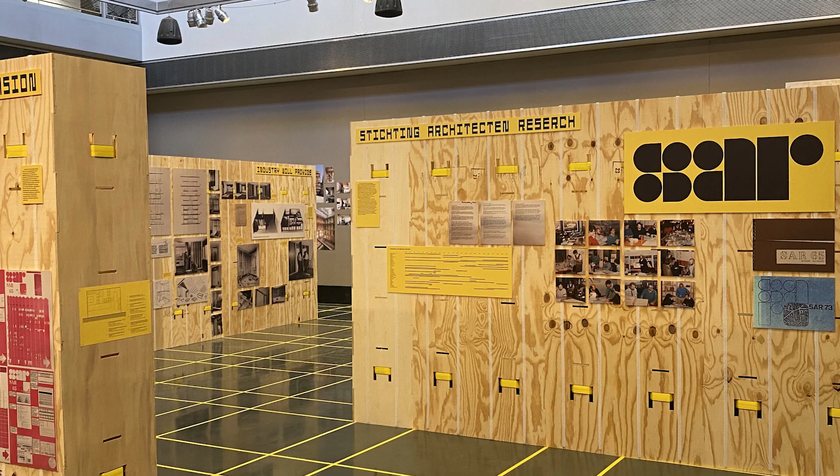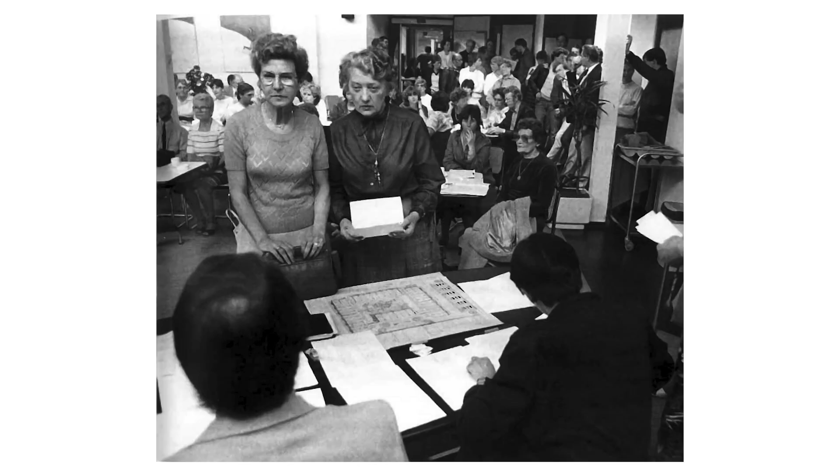Mass Support supports the legacy and contemporary relevance of the Stichting Architecten Research, SAR, and excuse my Dutch, a Dutch architectural think tank active between 1964 and 1990 that proposed a radical new way of thinking about mass housing, one that fused the efficiency of industrial construction with the flexibility of user customization. Initially led by John Habraken, the SAR suggested new functions for the construction industry, for households, and crucially for architects.

Today, an impressive array of speakers will address flexibility, resident input, and modular building in contemporary residential architecture. The symposium will complement and extend the exhibition's themes, exposing the audience, who consists of students, academics, policymakers, and practitioners, to the under-examined interface of robust community engagement and innovative construction technology. I look forward to their insights on these important questions. What can resident control enable politically? What can modular construction enable architecturally? And what can flexibility enable at the neighborhood scale?

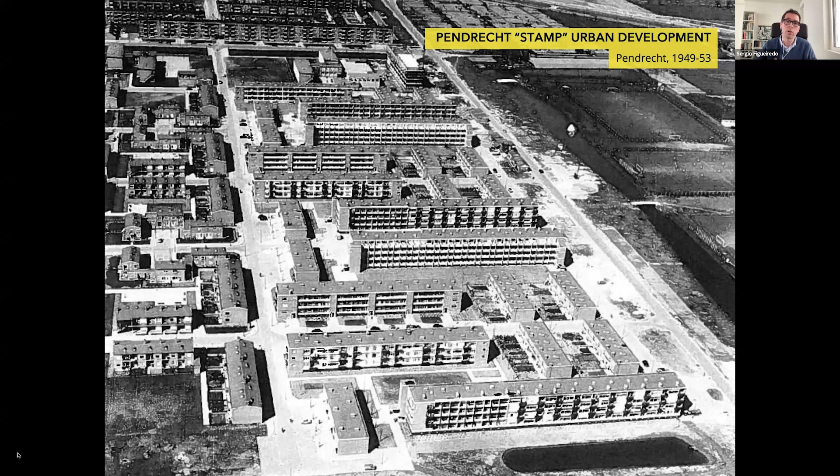This was also, let's say, supercharged in the early 1960s when the housing minister at the time, still intent on counteracting the housing shortage that was still acute by then, not only attempted to stimulate housing production, but also to encourage industrialized building techniques. Again, this created a lot of uniformity in the built environment.

So the consequence of these big building projects of system buildings and other rationalizations of the building process was, in fact, the creation of a rather monotonous urban fabric, primarily in the suburbs, but also increasingly so in the inner cities, with almost the same block of flats and almost the same terraced houses everywhere in the Netherlands. So this has been identified by some critics in the Netherlands as an urban environment that was seemingly lifeless, monotonous, and where very little attention was paid to the user or the inhabitant.

Now, the SAR, as will become apparent, I suppose, not only during this introduction but also during the talks that will follow, actually appeared as a response to that. It had a practical component, which was the realization by some architects in the Netherlands that by following an industrialized building process, the architect was losing its position within the building process itself. So there was a big concern that construction companies were taking the lead in developing and shaping the built environment in the Netherlands. But there was also this concern about reconnecting, as Habraken would claim in his 1961 book, Supports and Infills, man and his environment.

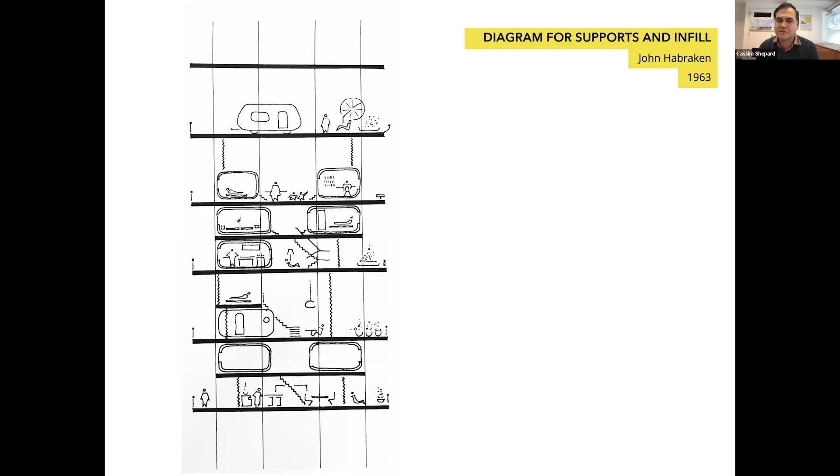Absolutely. And I think that's such an important point, because they weren't designing for only formal expression, they were also not designing for something to be finished, right? It was about advancing specific methodologies that could reintroduce a sense of agency on the part of residents into determining what is the configuration that makes the most sense for that particular household.

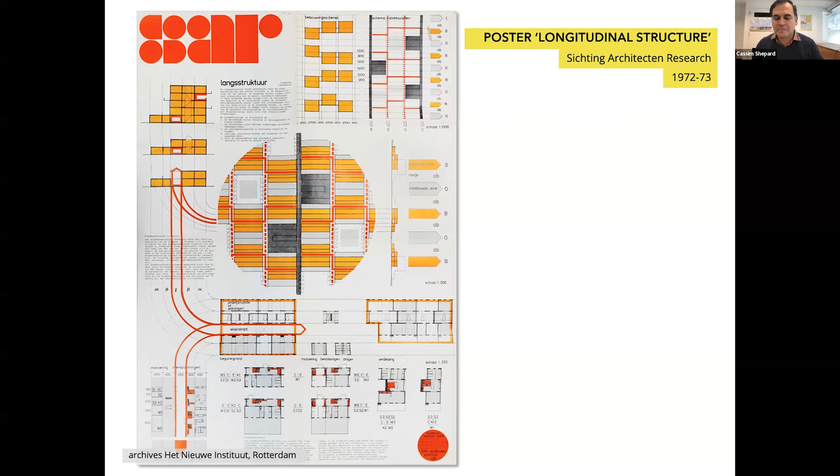And I think sometimes those who do remember the SAR think about it in terms of the technical solution that was advanced, but I think it's always important to remember that what's at its root is not necessarily the technical solution, but this deep desire, this refusal to remove the agency of users from that decision-making process. Who decides when about what? How can we design now for uses and different program requirements that we can't possibly anticipate?

I love this image, which demonstrates some of the different ways in which they designed processes for user consultation with residents who might have different kinds of household arrangements, different kinds of family structures, different kinds of needs for their space. And that emphasis on the diversity of different household types and how you can create systems to deeply observe how people use space and use that to inform how you can create systems that can change over time, I think it's something that really resonates today.

They also were very involved in informing pedagogy. As was mentioned, one initial home, both for Habraken as a professor, teacher and curriculum builder, and also for the SAR and their experimental approach to designing these processes, was at the TUE, the Eindhoven University of Technology. And one of the many interesting architects who's continuing to interpret and reinterpret and think about the lasting influence of these ideas is Tom Frantzen, who studied at the TUE after John Habraken had left and had moved to chair the architecture faculty at MIT in 1975.

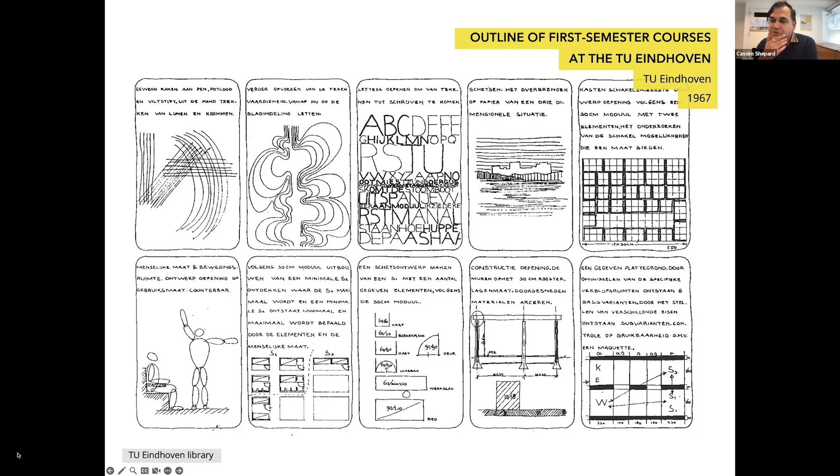So I'm very pleased to invite Tom to share with us a little bit of his approach to open building, the legacy of both the educational parameters that were established at the TUE, but also the lasting influence of Habraken on Dutch architecture, and how his views on these learnings have changed as his career has evolved. So welcome, Tom. Please share with us.

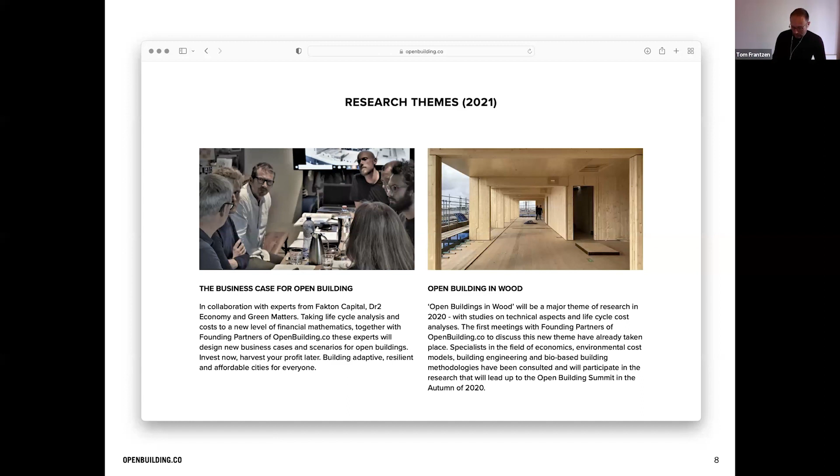We have 14 founding partners, and in 2021 we rewrote a manifesto, which of course also incorporates the legacy of John Habraken. And we identified a few research themes, especially the business cases and building in timber. The business case being very important because normal developers weren't interested in open buildings because they simply thought they were too expensive. And to show that it wasn't, we had our case studies that were mostly actually built to show that it is possible to build open buildings.

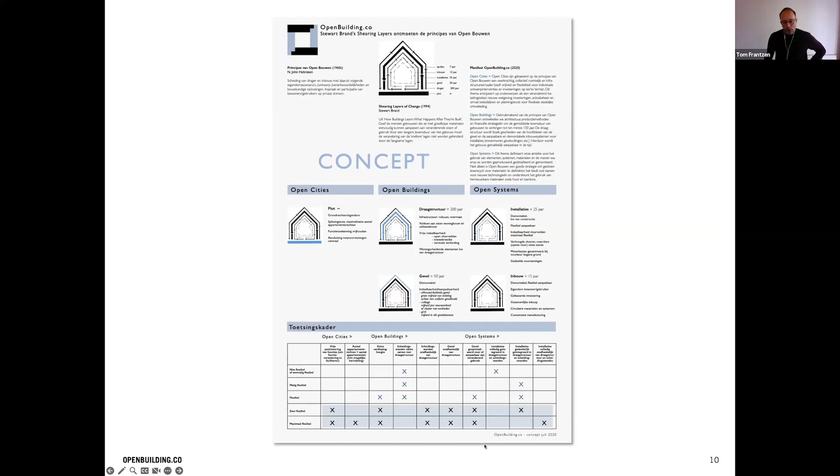We also identified our concept, and here you also see the shearing layers of Stewart Brand. And we developed evaluation criteria, which are more stimulative. And we would like to build buildings at a maximum flexible level. And we did so in the Buiksloterham in the north of Amsterdam.

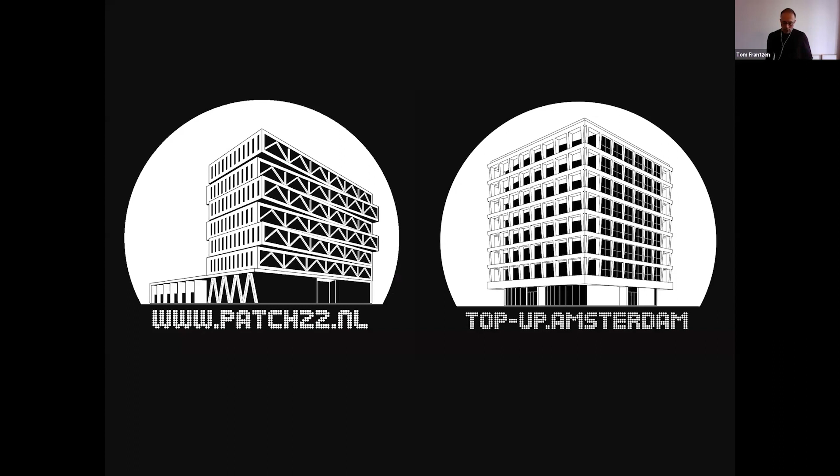These are all buildings in the north of Amsterdam and all built by architects of the open building community. And in this area, I built two buildings, Patch 22 and Top Up. And as Kasim explained, to do so, it was necessary to start a separate firm, a development company.

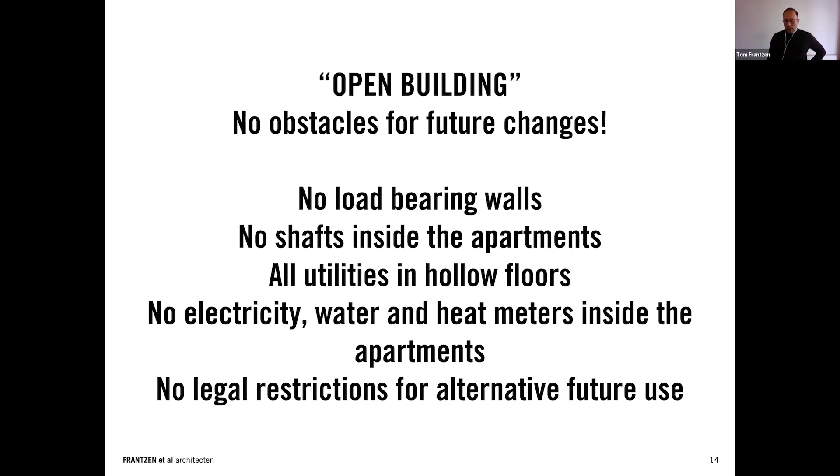And for us, open building means that there should be no obstacles for future changes. So in a technical sense, there should be no load-bearing walls, no shafts inside the apartments, all utilities in hollow floors, no electricity, water and heat meters inside the apartments. And also very important, there should be no legal restrictions for alternative future use.

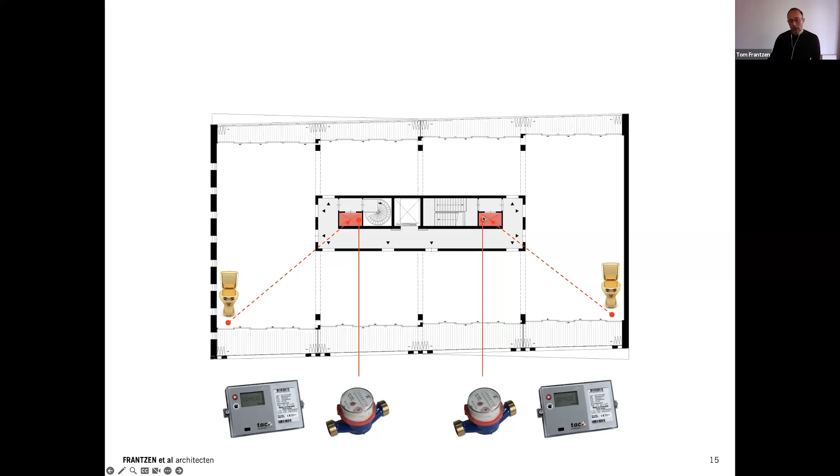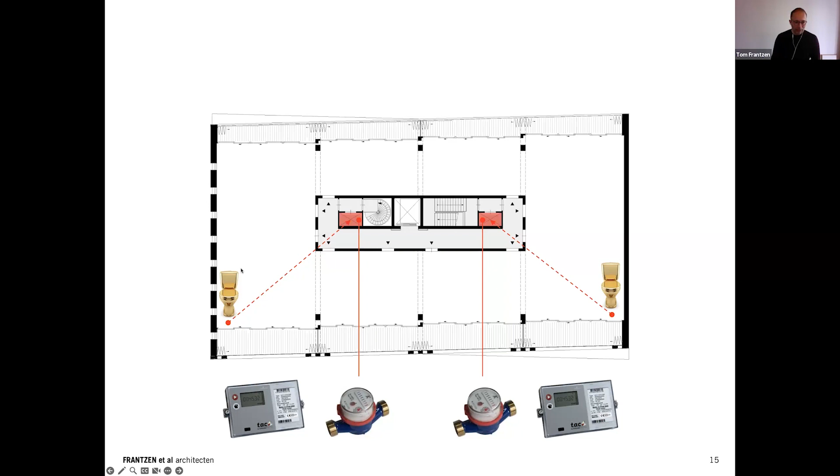This is the floor plan of Patch 22, in which you can see that it is a totally open floor plan with the meters inside a shaft in the central core, and enough sloping angle through the floor to be able to set up a toilet in the outmost corner of this building.

It is also possible to divide this building into maximum 48 apartments. And there are also a maximum of 48 legal units in the division deed, which is very important: once you build an open building, an adaptable, flexible building technically, you should also be allowed to use it flexibly in the future. And this is done in all the legal contracts that are involved.

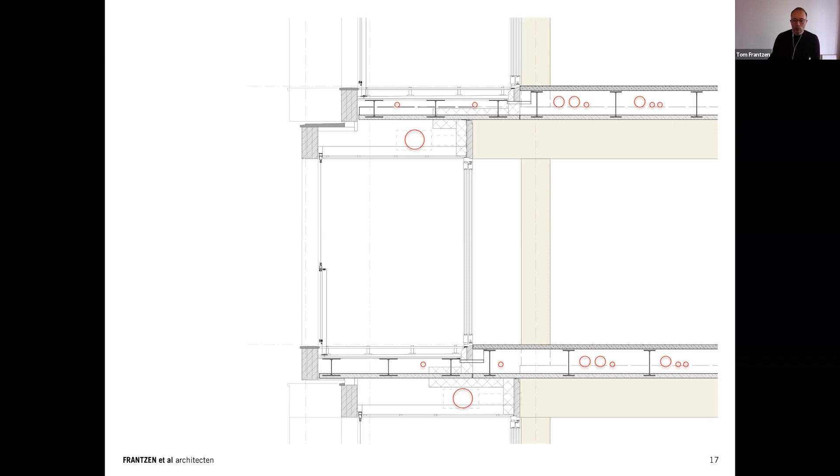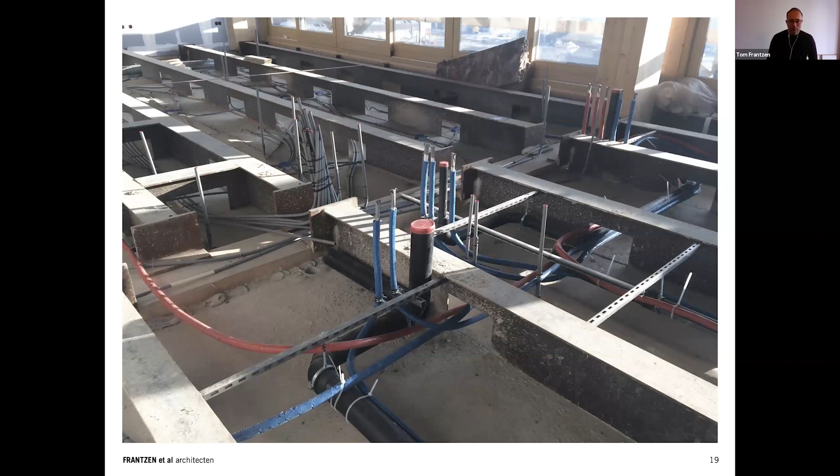We designed hollow floors in which you have all the piping and all the drains. And this is what it actually looks like when an apartment is almost finished for our buyers to enter their homes. Our buyers could install all their drains and installations themselves in the floors, and then put on a top floor, and then start with their infill.

And to get back to the article that Cassim wrote, Mass Support, it says for Habraken, the distinction between the base building support and the fit out, the infill, is primarily one of control and design and only secondary technically. So that demands that the return of consultation and involvement on the part of the users in the most literal sense must be accepted.

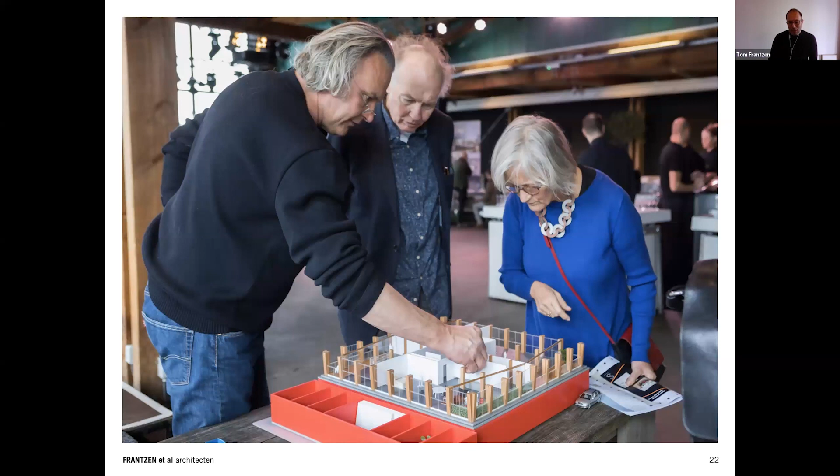And I think that is exactly what we did, and we sort of reinvented the wheel, because we were not familiar with the ideas of Habraken, but we started to recognize them again in what we were doing. And it is funny that we were almost doing exactly the same. We have built models with removable building parts in which users, under the guidance of architects, could simply try out floor plan layouts in the units that we designed.

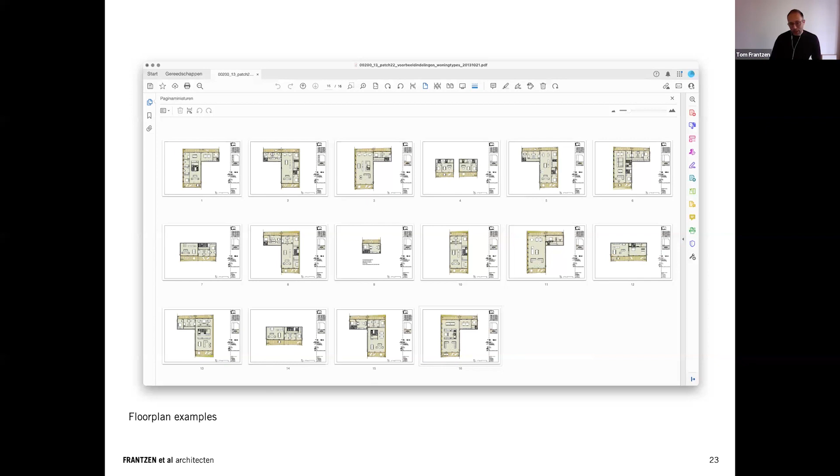In Patch 22, of course, to show the possibilities of such a building, we designed a lot of floor plan examples. But it is funny to see that none of those floor plan examples was actually built. In the final building, we had 21 owners, 26 apartments, and none of them used one of the example floor plans. Because when it's possible for people to design their own homes, they become far more specific than the scenario thinking that we as architects can do.

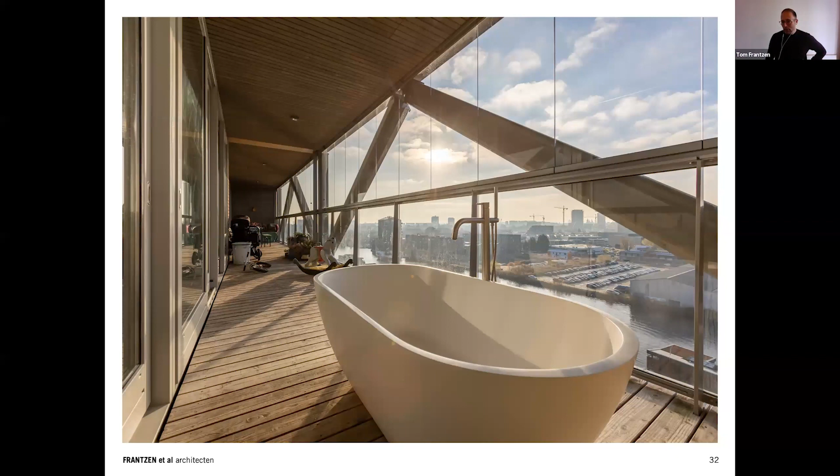So I will just show you a couple of images of the different apartments that were the result. And he's very happy with his apartment. In this apartment, children learn to cycle inside. It's even possible to make a vertical connection between the units. And what we never thought of, but people started to install bathtubs in their loggia balconies.

So this is all collected in one collective building, Patch 22, which has a strong identity. And I think that is very important, that a collective building has an architectural address and doesn't show the individuality of the buildings. This can be done in terraced housing, I think, but not in an apartment building.

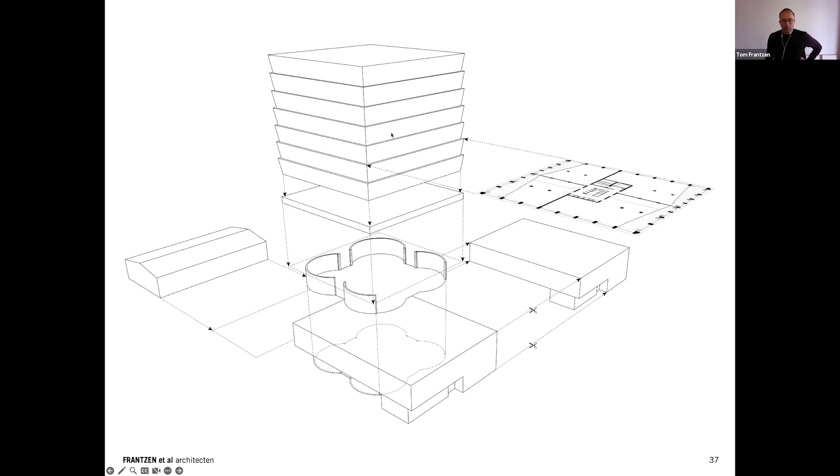And we were very lucky that we were able to buy the plot next door. And on this plot, there was a former industrial building that we could simply top up, just as was mentioned in the report, as an important strategy to stay within the ecological constraints of building. So we kept these round concrete walls, and on top of it, we installed a new timber building, which again, like Patch 22, is a totally open floor plan.

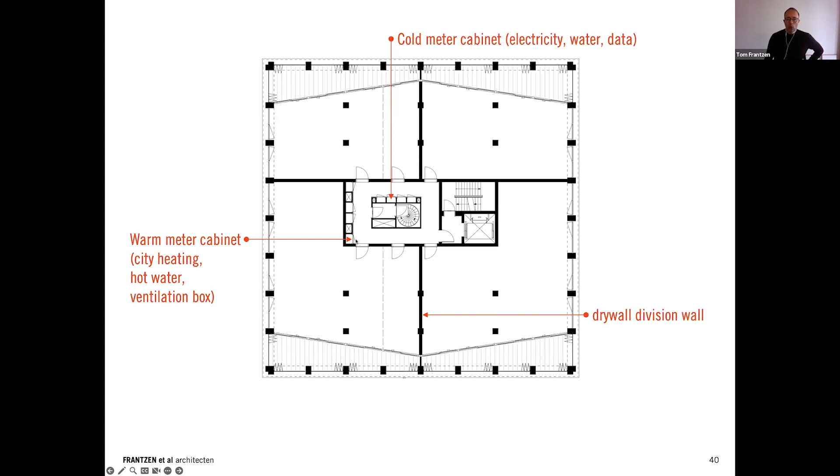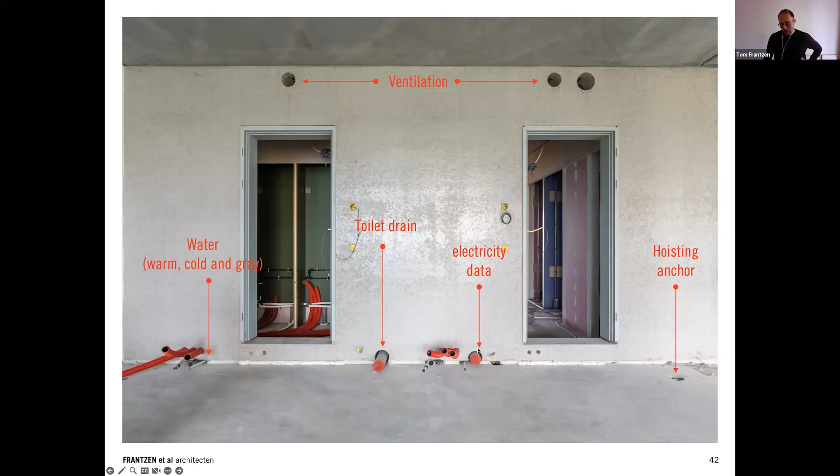And this time we showed a lot of example floor plans, and again, none of them were built. In the end, the floor plan was divided up into mostly 4 apartments, and it is very important that all these meters are inside the communal core, and this is what that looks like. So this is a technical solution, and this is what it looked like when people got the keys to their apartment. So they could connect to all these openings and drains and the other supplies. This is really what it looked like when they stepped in after they bought the apartments.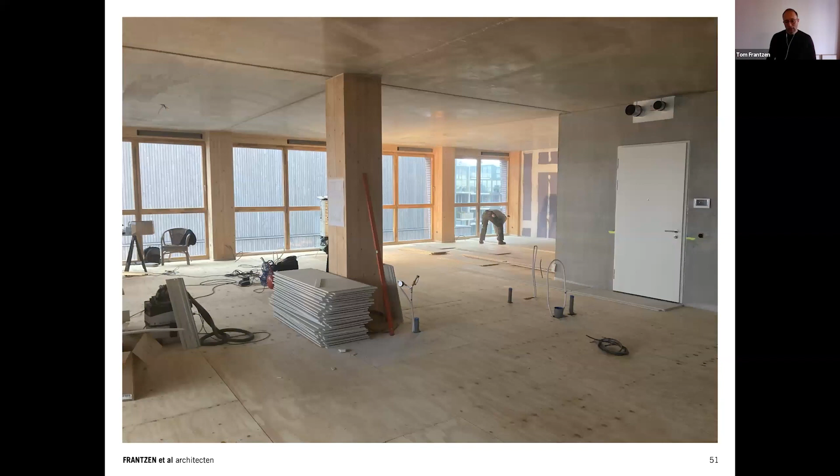Then cement-based panels in which radiant heating is installed. And again, people started installing bathtubs on top of their balconies. And instead of having the bedroom next to the window, they installed, for example, their showers and bathrooms next to the facade. Again, a few images to show the individualization of these apartments.

And of course, this is all high-end. This is not affordable housing. But like when Tesla started with the Model S, if you want to sell sustainability, at first you have to sell it to people that can afford it. So that is also the case with adaptability.

And in this way, we had two buildings built in the north of Amsterdam, and I think this is the state-of-the-art open building at this moment in the Netherlands. Thank you.

Thank you so much, Tom. I think that really provides an excellent context and grounding, both in how these ideas of open building continue to live on, but also how they continue to be reinterpreted. And whether or not one is directly aware of the provenance of some of these ideas, there are things that are baked into the DNA of a lot of the education that I know that you received, and hopefully will continue to be a feature of architectural pedagogy going forward, thinking about flexibility, not just in terms of

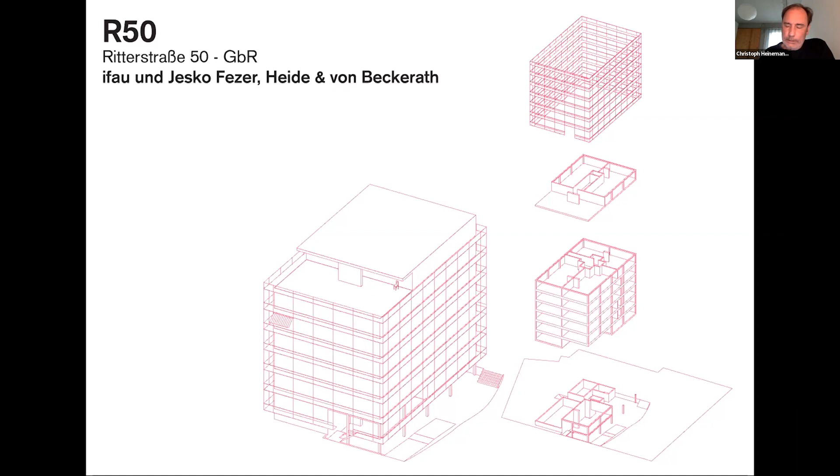This may be important for the discussion afterwards, how the role of the architects may change, and also how such projects can be developed, and what is the political and institutional framework behind it. The project R50 is situated in the Ritterstraße in Berlin. It's in Kreuzberg, so it's in the center of the city. You can see the building here in between modern housing development.

Post-war, the whole area had been destroyed in the war, and there are buildings from several phases of reconstruction of Berlin. The wall is not far from there. So when the wall was down, suddenly this area was at the center of the city again. Before it was, you could say, the fringe of West Berlin. And as Berlin housing is based on rent, most of the time, the city wanted to introduce some spots to install projects based on ownership, interestingly, because this policy has completely changed.

But at the time, as we developed the project, there were no programs, there were no subsidies for affordable housing or social housing, you may call it like that. So everything was on the free market, and the city asked for concept-bound competition. So you can enter a concept for a housing project, and they would give you the land and 1 year time to develop a project, and you could acquire the land at a fixed price. So it was out of a bidding process, so you could install quite affordable housing projects. And this opportunity was very interesting for us.

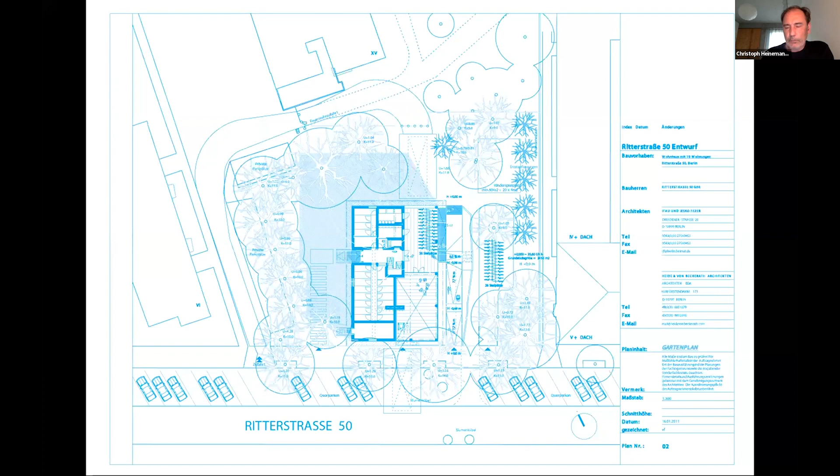Briefly, the building on the site. It's positioned in the middle of the site with a surrounding garden. The garden in this context relates to all the gardens in the surrounding, to the open fabric, but the house also relates to the street with its facade. And I could talk hours about this context in between modern housing fabric and all those changes that took place in Berlin in the last 60 years. I will spare you this and come to the structure of the house.

Tom Frantzen already explained what is important for such a building. It's not an open building, but we wanted to allow different types of negotiation based on the two premises along which we developed the project.

One premise was to allow for individualization of the apartment layouts, so to really allow the future inhabitant to create his own apartment, and further on we wanted to allow for transformation of the apartments in the future, and secondly we wanted to allow for a high amount of common spaces.

From the start we included a high amount of common spaces also in the budget, and we wanted to allow the group of inhabitants to negotiate the disposition and the place where common spaces should be and with which program. So what did we do?

We have a central stairwell with a lift in the middle, and we have a surrounding row of columns every 6 meters with a supporting beam, and the floors as such have no further obstructions, so that we can size and resize apartments according to our needs.

We have 3 shafts: southwest, southeast, and north. In the north apartment, we have light from west and east and north, and the shaft in the middle, and in the other apartments along this wall, so that the position of bathrooms and the toilets and the kitchen is fixed, but the rest of the floor is open. So in our project, you can't move around your toilet as you wish. It is really bound to the shaft.

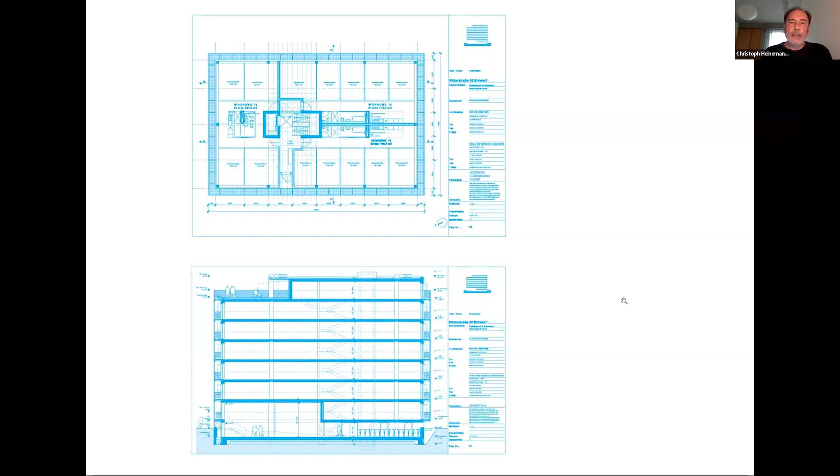So here you can see a conceptual drawing at the beginning of our project, where you can see the fixed parts, like the stairwell and the bathrooms and the kitchen. And you can see that you can furnish it like an apartment, like a loft, and you can also densify it with separate chambers or rooms.

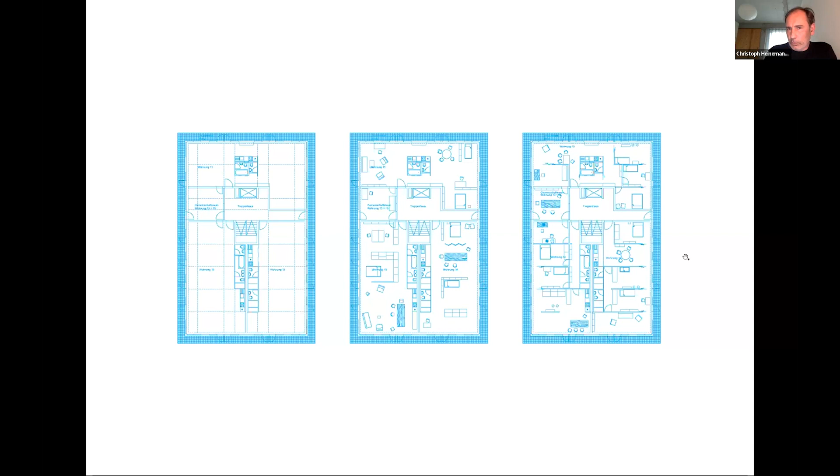And what may be interesting also is that in the beginning we included 25 square meters of common space on every floor. We wanted to do a cooperative. Afterwards, the group decided to change to real ownership, and with this change in the framework, also the disposition of the common room changed.

And this is a point I really want to stress, because for us as architects, this is a very important driver, that with the user participation, we can really create architectural elements with a very specific quality, and at the same time, for instance, affordable housing, because there is no contradiction with a user and the elements we apply.

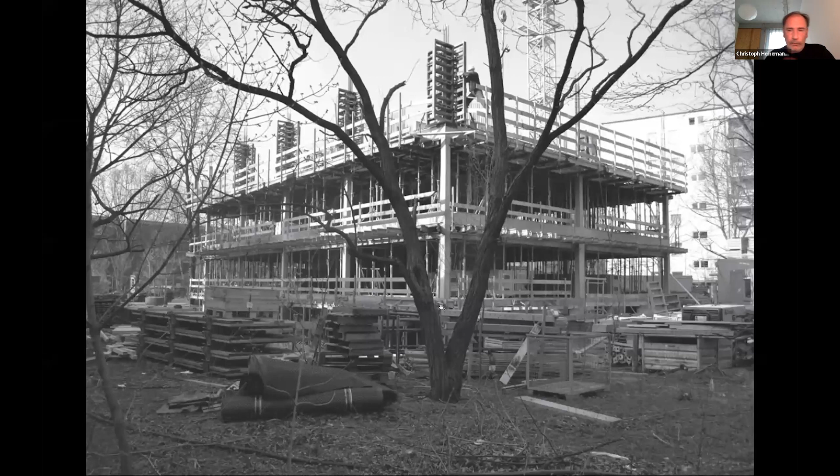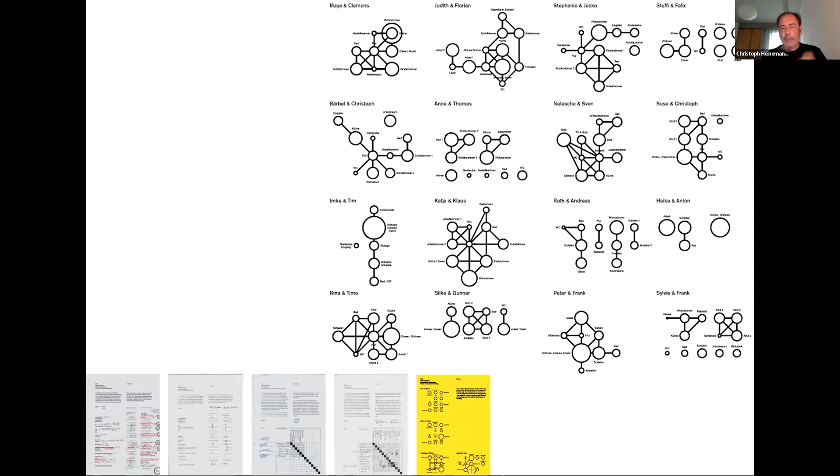So this is what we may call the support, the columns and the floor space, and this structure allows for a multitude of relations of different forms of living, of dwelling inside the building. We started with those diagrams. We asked every family to make a diagram on how spaces should relate, and we took these diagrams as the base of a design of future apartments.

And you can see we have 19 different apartments now, which are based on a common standard of constructive elements. So you could say they are same, but different. Spatially, they are completely different, but they're all done in one standard of several ways to construct plasterboard walls, etc.

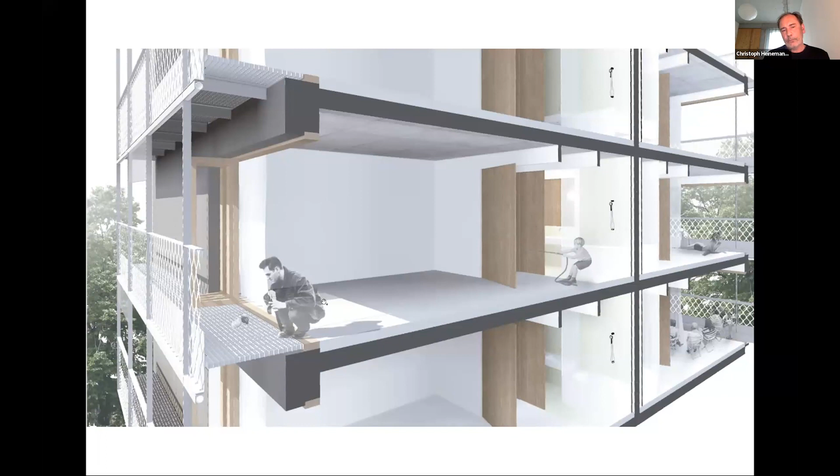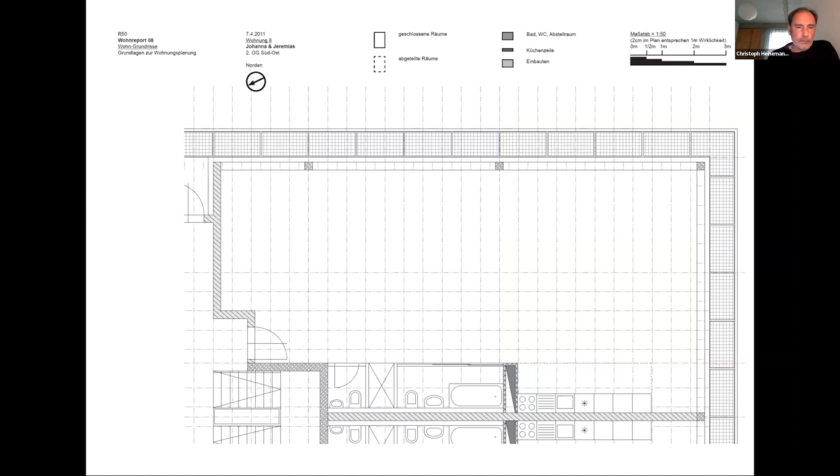Here a section. You can see the balcony allowing to step out of every room, and the supporting floor. Just a short stroll through a design process, a diagram of one family, and for a start, and then this 60 centimeter grid loft space, we started to test different approaches to the apartment.

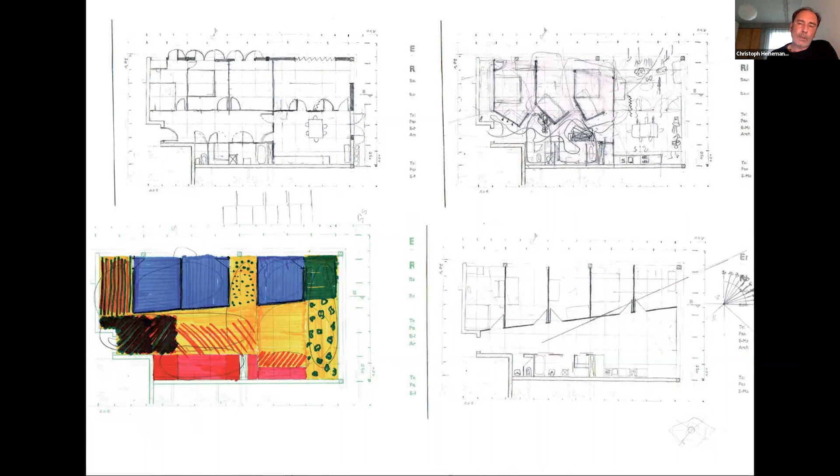In this case, they wanted 4 rooms and a large living room, and they used what usually would be a corridor space to create a larger living space. This was our answer as architects, putting this into norms and standards and layouts we could handle. In the end, you can see the apartment here above with a large space here, and the kitchen should have been here.

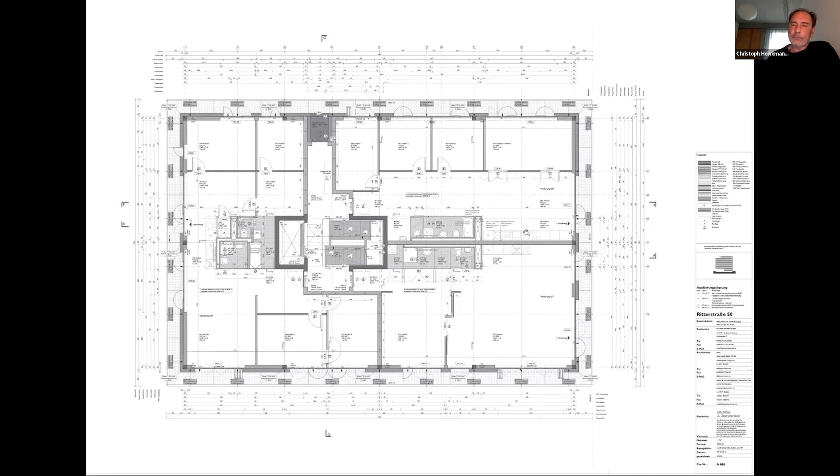And when they moved in, they discovered that the wall was beautiful. They thought it was beautiful, so they decided not to move the kitchen here, but to move it in the back, in the middle of the apartment. These are possibilities, and this goes on with this type of transformation.

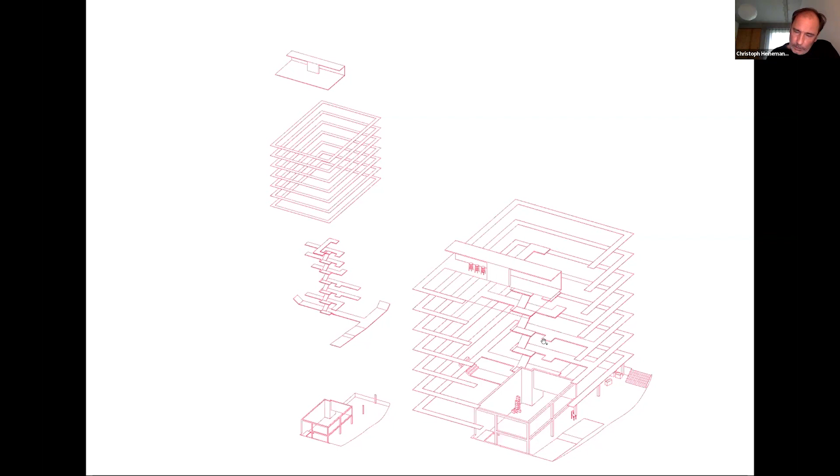Another part of the negotiation process of the inhabiting process, which starts in the planning phase, was to find out where to position the common spaces. And this is a party we had in the future common space, where we decided to pool all the 25 square meter spaces we had initially on every floor into one big space,

because changing from cooperative to ownership means if anything fails, if, for instance, our common activities would fail, we would lose interest. We would need to sell the space, for instance. So there was a very interesting decision to pool all these 25 square meters into one big space, which we could maybe sell someday.

60 seconds, Susanne? Yes, about 60 seconds. Perfect.

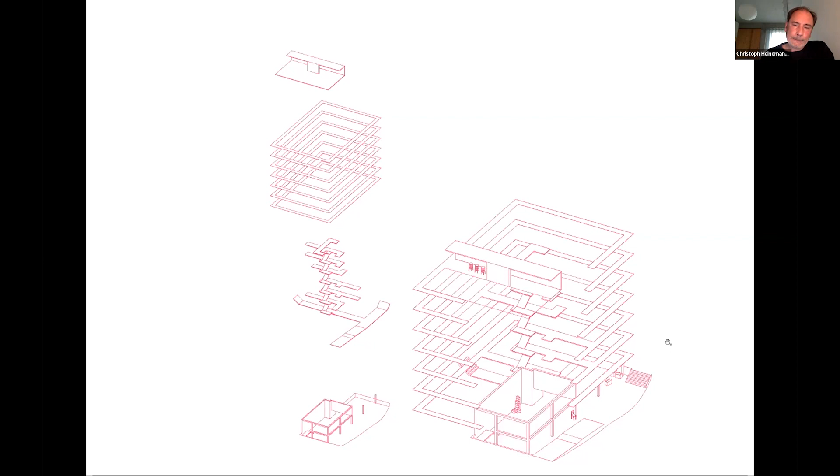All right. So what you see here in this axonometric drawing is this big common space, and all the other common spaces, because also the balconies are common spaces in this building. So we had several discussions on the use of a common space, and there are multiple activities like working, making music, having parties, having a space for guests, and they're all conflicting activities.

And we found it very important to have a space which allows for all those activities and uses, but also maintains a certain form of conflict and of continuous negotiation, which keeps the space really alive and puts it into question every day. This is a space in its final stage. And

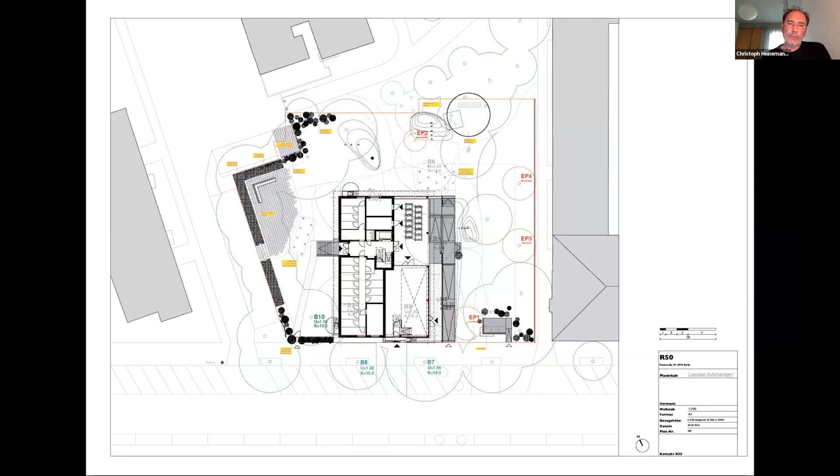maybe just another hint about planning, the agency of inhabitants. We did the garden only a year after we moved in. It's a continuously changing plan. We're designing it together and changing it together. And just for the end, you can see how the building looks today.

Thank you so much. Perfect. I think that perfectly explained the building. I think we can move around in it now, and let's move on to Barcelona, and then we can compare these projects in various aspects.

So Cristina, I'll give you a 2-minute notice. Does that sound good? Good. Perfect. So I share my screen. Hello, everyone. So I hope you can see the screen.

So I will introduce the case study of the cooperative housing project of La Borda in Barcelona. And basically, this is our first collective housing project. And it was the first cooperative housing developed following the model of right of use on public land in the city of Barcelona. And basically, I think it's really important to contextualize, because it's a project that emerged in a specific moment and in a specific place.

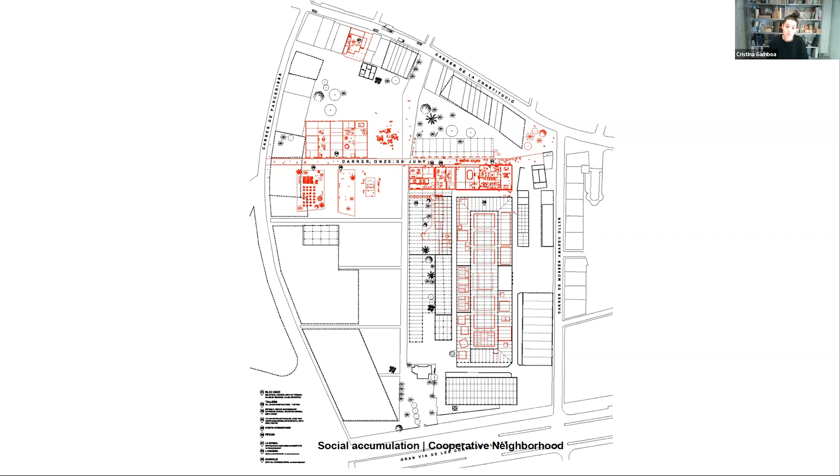So it was an opportunity for the neighborhood to really start the transformation and implementation of a series of projects, to really build a community in that context. And that's why we also like to talk about social accumulation, sometimes a better kind of name instead of social innovation, that sometimes these kinds of projects and new models are also understood in that sense. But I would say that without the economical and social context, without this frame of Can Batlló and the neighborhood, this would not be possible.

And basically, from the General Assembly of Can Batlló, thinking of new forms of providing decent, stable and affordable housing, the General Assembly of La Borda, this co-op emerged, and was following a model that was present in many other countries. So the General Assembly of the project was learning from Uruguay with the FUCVAM model, from Denmark with the Andel model, and many other models that are present in countries all over the world.

But the key points were this idea to provide a non-profit model based on collective ownership, where the member of the co-op and the future inhabitant has the right of use of one flat for their entire life, without a time limit. So basically, the collective ownership was a tool to avoid speculation. When we are talking about Barcelona, where there is such a small amount of social housing, where the private market is totally controlling the housing stock, it was one of the main values and ideas of the project.

So this idea to avoid speculation, to make housing affordable and inclusive, and through the co-op, it was a community-led project, and the project didn't want to become a specific and unique project. The main idea was to really become a model, to be replicable and as sustainable as possible, environmentally, economically, socially. So understanding sustainability of life in the broadest way possible.

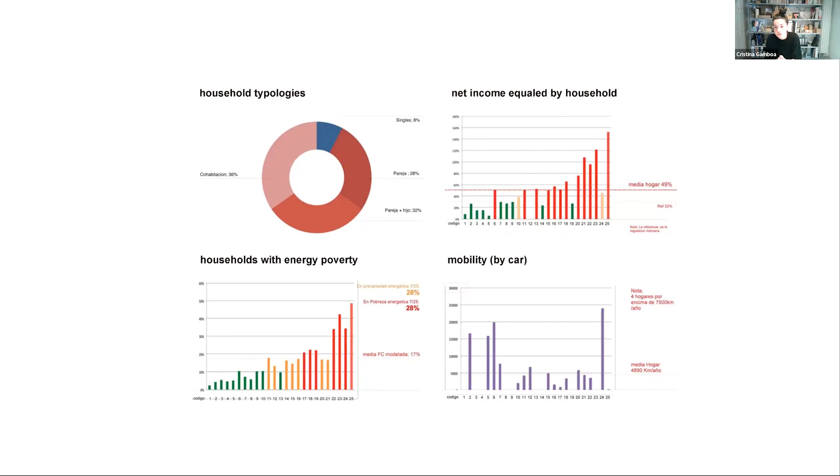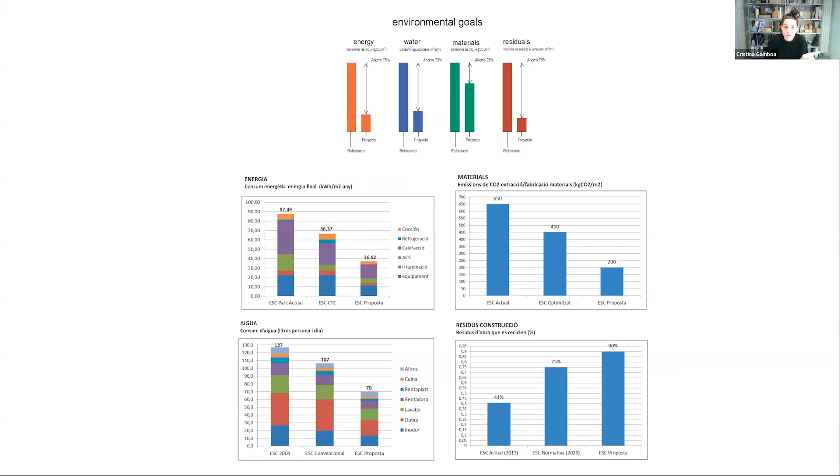And so a series of methodologies allows us to really understand this radiography of the community that give us this key information to challenge, for example, the parking regulations, but also in this process of understanding the user and setting these values and frameworks of the project, discussions about sustainability, how we define the goals of the project, that basically were key to define the energy strategy and also the material strategy. So this idea of a passive building that is led and controlled by an active user. So the main strategy of the building, densifying the south facade, generating a courtyard that became energy saver, and all this with this kind of transition from the public space to the common areas in the ground floor with a public passage to the most private units in the upper floors.

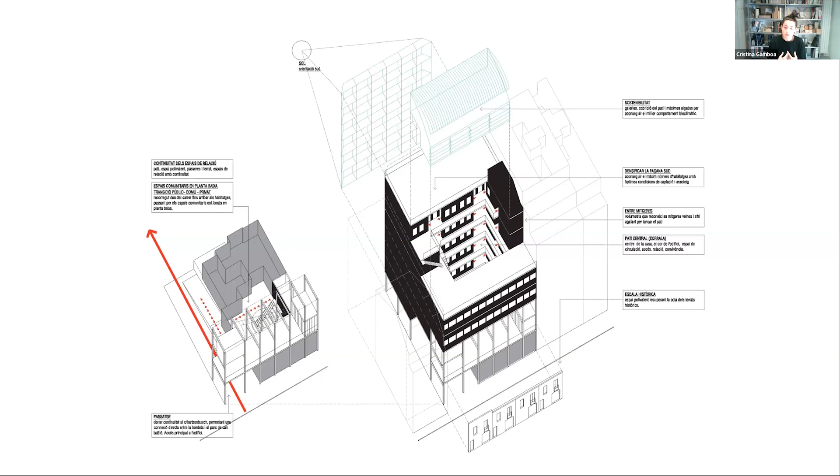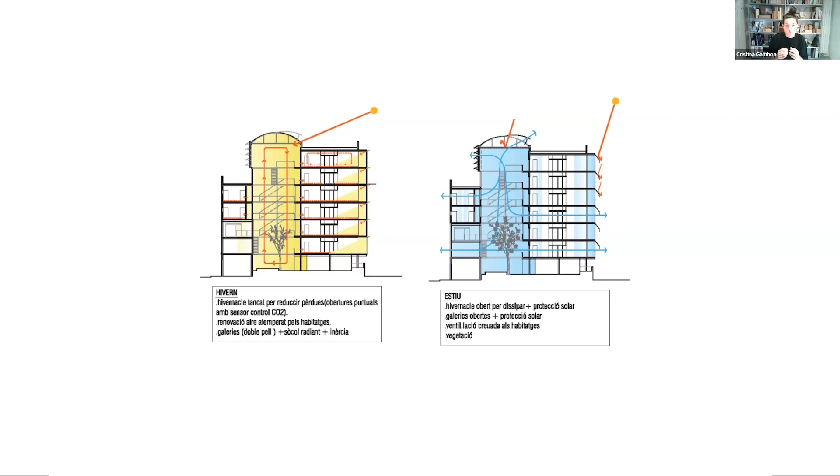So it was a combination of the community model and the energy model, and with this kind of unbalanced section where we can see how we densify the south facade to put as many units as possible, and also how all these thresholds and in-between spaces became energy devices, but also spaces of interaction of the community. Cristina, you have 2 minutes left.

Exactly, great. And basically, all this transition from the public to the interior, to the common areas in the different levels of the building, arriving to the common spaces. The second step was this discussion about the common areas and how these common spaces allow to imagine new forms of conviviality that had an impact in terms of gender distribution of the household, but also in terms of economical and environmental aspects. But what was even more important was how this was also defining a redistribution of the area of the unit. And this was key to start imagining the matrix, the scheme and system to define the units.

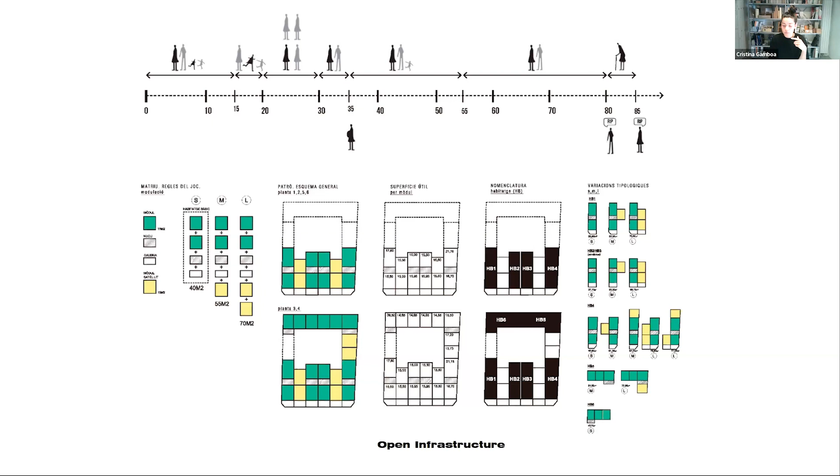And basically it was through a matrix of non-hierarchical spaces that can be connected and organized in different typologies, something that can change through time through a structure that was interconnected, allowing with light divisions to define the size, type and characteristics of typologies. The layers that we were adding to this CLT structure were basically the installation, kitchen and bathroom, and also allocating outside the unit all the heating meters and all the systems to facilitate the maintenance and the exchange of the site.

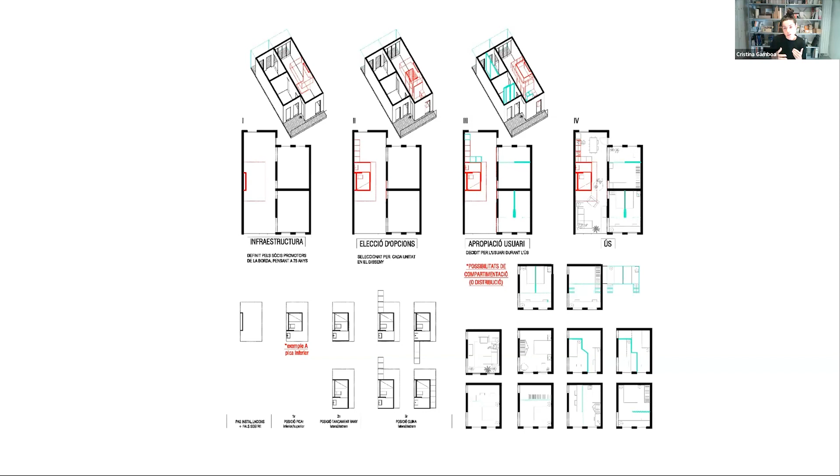So it was this idea of the infrastructure, the set of options with the position of the kitchen and the entrance to the bathroom, and the lighter divisions based on the user needs. So it was also important to define a protocol and a manual to really understand how to intervene, to make it easy to be removable and to change in the future for future inhabitants.

And basically this was this kind of naked infrastructure to be transformed by the user with really simple materials and solutions, and also to reduce the cost, this idea of phases of construction with a second phase for all the common areas to be transformed in the future, at the same time that all the activities started to be developed, realizing the impacts of all these activities in the building.

And I think that we can discuss this later, but basically La Borda became a pioneer project as a policy in Barcelona that was promoting new cooperative housing, also the emergence of new stakeholders, and also its replicability outside Barcelona in all of Catalonia.

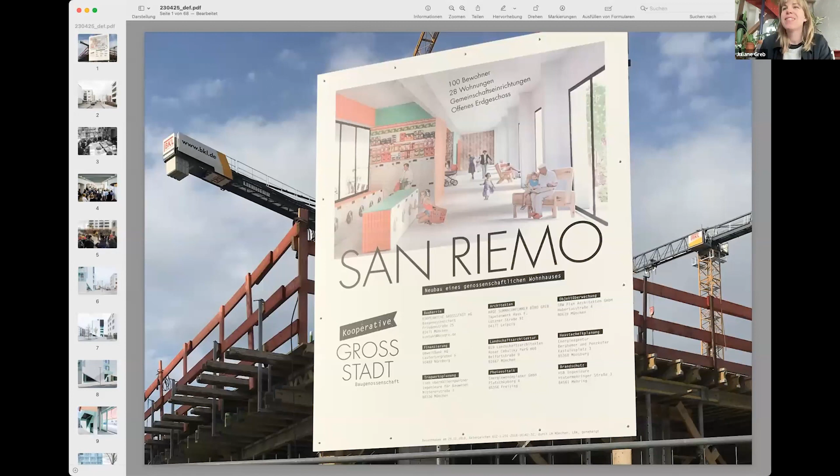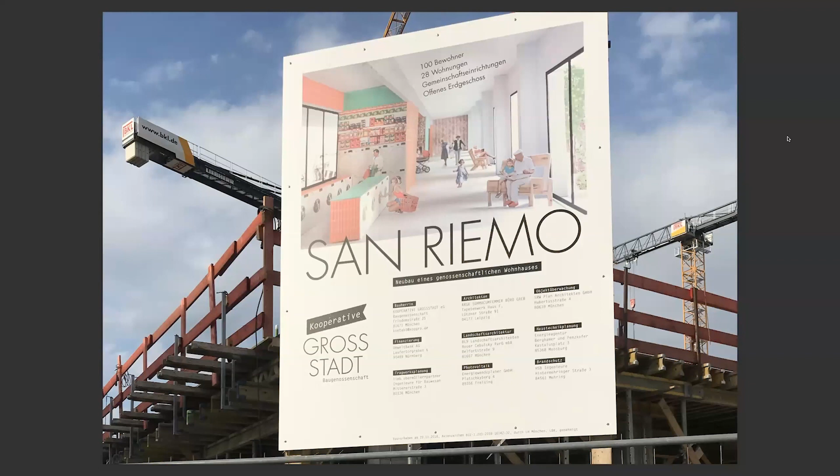Great. I'm going to present the project San Riemo, which is the first residential project for the Kooperative Großstadt, a housing cooperative that was founded in 2015 in Munich, I think the most expensive city to live in Germany. The cooperative was founded by a group of architects that were unsatisfied with the quality of new housing being produced in Munich, but also of course the lack of affordability of housing in Munich.

And they gathered a group of members, future residents, and bought a plot in München-Riem, an area that's only 20 minutes from the central station, but still has a bit of a suburban feeling. It is right next to the trade fair in Munich, and the whole area has been developed within the last 20 years on a plot which was formerly an airport, and it's quite homogeneous.

Housing is quite dominant even on the ground floors, and other functions like commercial or community functions are bundled in one place. So it doesn't have a very urban feeling, also because of a lack of density. What the cooperative did was formulate a quite ambitious brief for the project. They wanted to activate the area and also implement partly experimental forms of housing.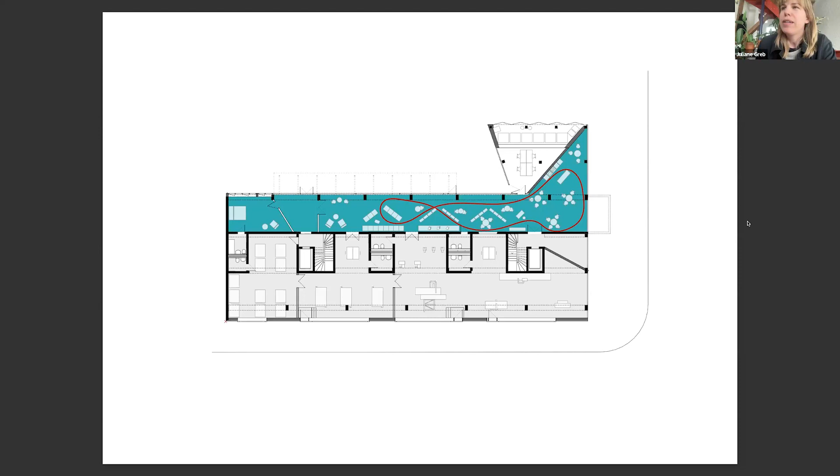This is the ground floor plan. Here you see the corner, and the gray area with the big windows that you saw in the picture before is a space that's currently rented out to a youth organization doing youth work in the area. And the green-blue area on the plan is all common space, collective space for the residents, also with a back door where the neighboring cooperative can enter. And that space can be freely programmed by the residents.

These are some sketches we did during the design process, where we had several moments getting together with the residents, discussing the use of the ground floor.

And this is how it looks today. So you enter into this big hall, which can be divided with these curtains, and there can be different activities taking place, like children playing or washing laundry. And there's a little workshop, wood workshop, as you can see here on the left, and a kitchen towards the street, where the neighbors can stroll in.

Here you can see with good weather, it works quite well as a mediator with the neighborhood. And also there's a connection, a maximum connection to the backyard, which is also partly shared with the neighboring collective, as you can see here.

Now I'm going to move on to the upper floor. So through this big hall, you also enter the upper floors where the apartments are situated. And for the apartments, the cooperative had in mind to have different types of apartments. They wanted a type of apartment that could grow and shrink. Another type where you could share spaces with a neighboring apartment, and basic apartments.

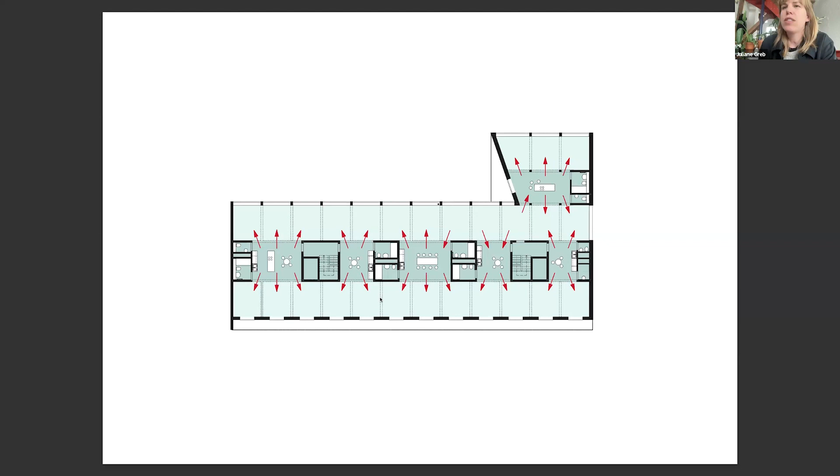And the possible rooms along the facade, they're all about 14 square meters. So they're neutral in use, and they're interconnectable as well, because these divisions here, as you can see, they're just dotted lines. Here you can see the entrance from the staircase into the kitchen. I will show more pictures later, but first an image also from the competition still, the central kitchen.

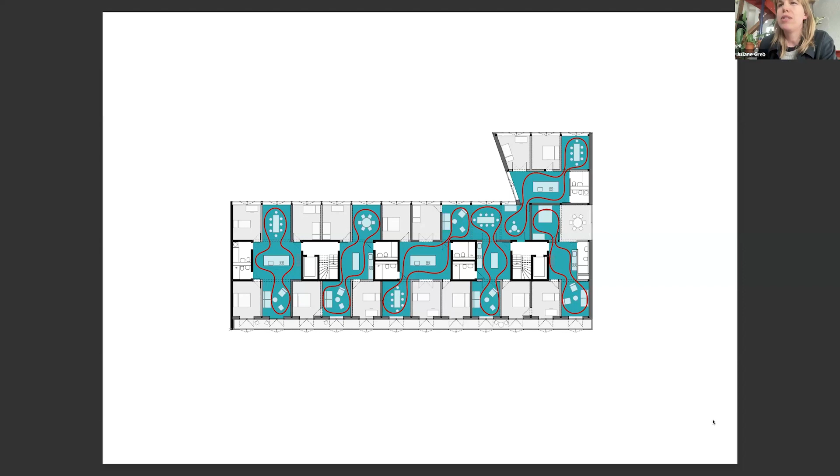And the idea was that then the residents could choose themselves. Do they want to maximize individual rooms in a shared flat situation, for instance, or do they want apartments where the living spaces are on both facades, or do they want to share spaces with adjacent apartments? Or they switch rooms between apartments.

So here, these little arrows, this is also executed like this. And here you can see a shared space that you would enter from the staircase. And from this shared space, you could enter into the adjacent apartments. And the apartments can also switch rooms between each other.

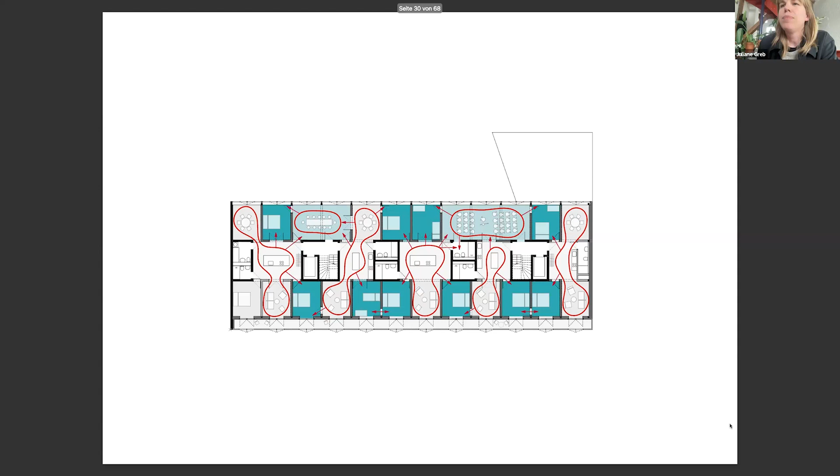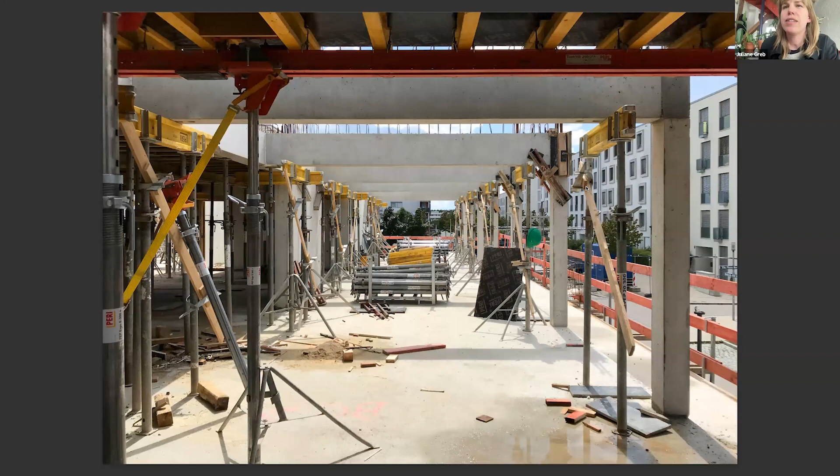So what we designed initially was actually basically this construction plan, and on the grid there's these prefabricated beams that kind of mark the possible plan on the ceiling in the spaces. And all the light infill walls, they were actually decided by... so here you can see again this system of the beams and the infill walls underneath. So the beams have a certain height, so you also don't need a door lintel above.

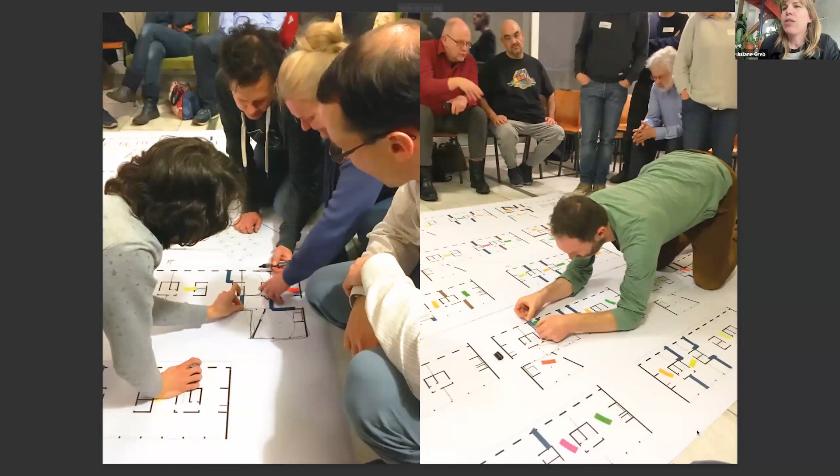And here on the right is the central space where the kitchen would come, and where the bathroom is connected right to. And all the light walls were then decided by the cooperative themselves. So this was the first participation session where they decided the extent of every apartment.

So this was a negotiation process, who would move in on which floor and how many of these possible rooms would they get. And the outcome was a number of different types of apartments. Looked a bit like this, and these grayish little extensions here, those were the so-called stairwell rooms that would be shared with the adjacent apartments, so with 3 or 4 units.

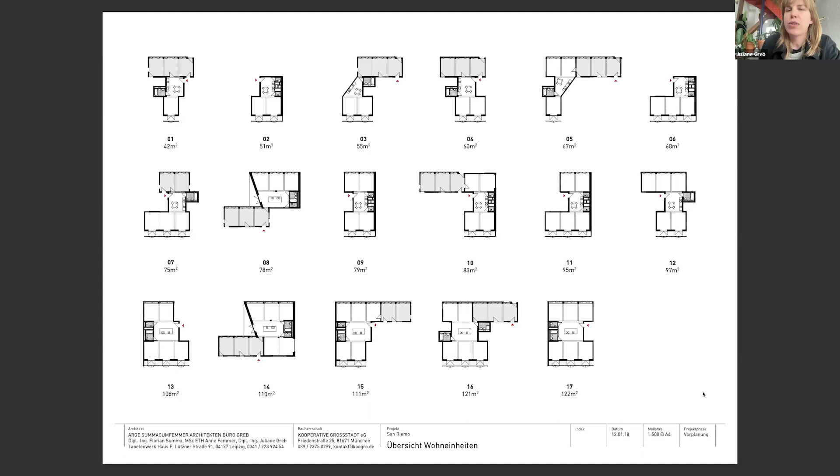So those are spaces that are not thought to be for everyone in the house, but more as an extension of the private apartment, and then you have a collective part together with 3 or 4 other units. And this was again some sketches from the process which we shared with the residents, convincing them of the possibilities that this would offer for them.

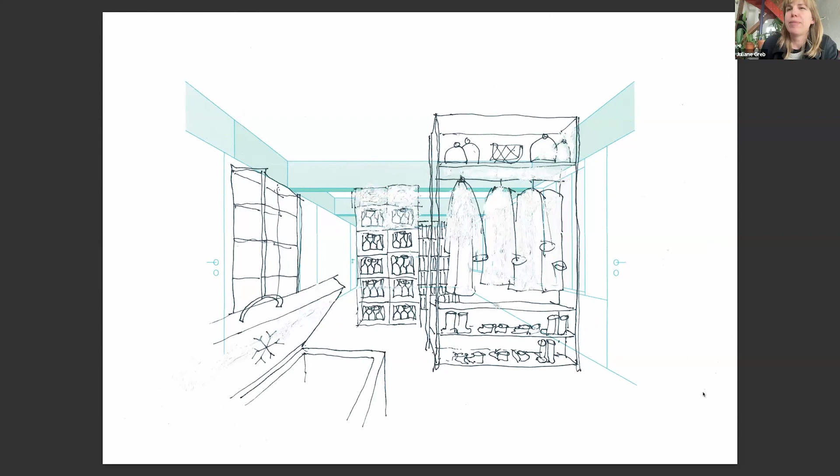And this is one photo today. Well, I think in many of these cases, it took quite some testing out how to use or furnish them. And this is another one.

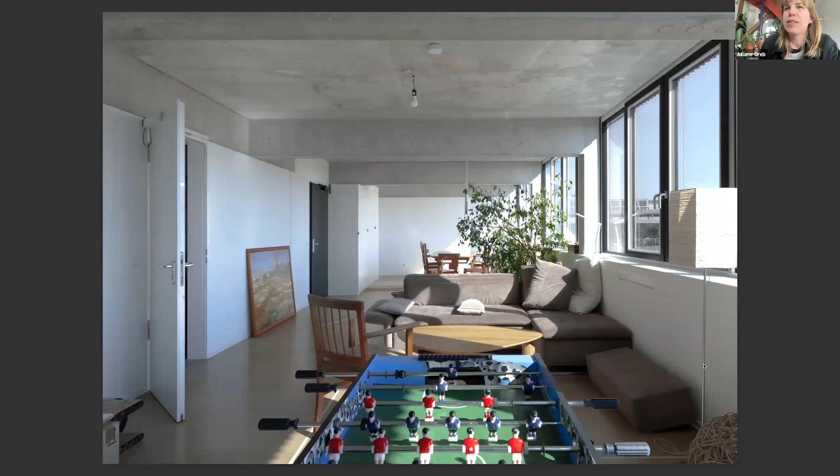So here on the left, you see the door to the apartment. The black door is always to the staircase. And then you can see here the smaller apartments. They can even open up like double doors towards these spaces. So it really becomes like an extension of their own apartment.

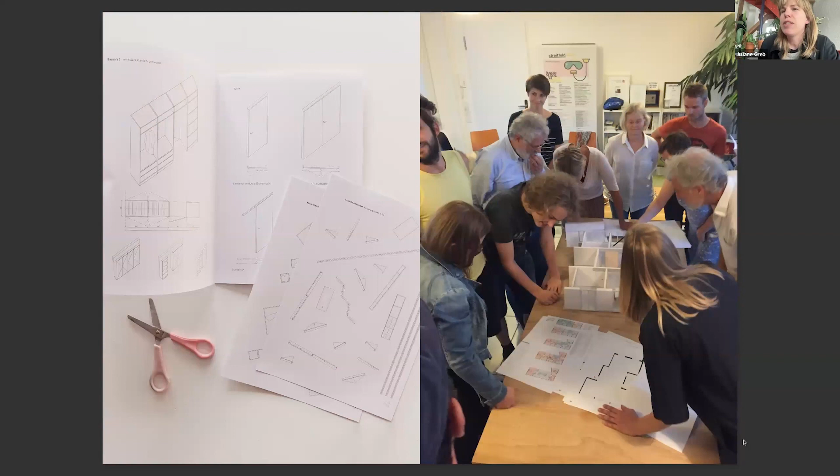And then in a second participation round, the residents, everyone got like a blank plan of their unit with the grid on, of course, and they could decide themselves where the infill walls would be on the grid and where doors or sliding doors or double doors would be, so they could determine how open or closed their plan would be.

And they got back to us with these cutout sheets, which turned out quite differently.